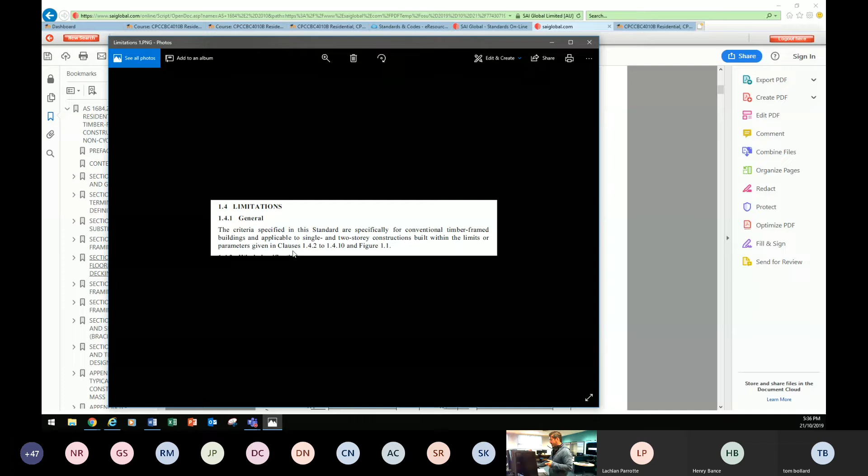This is for AS1684, I think it's .2. The criteria specified in this standard are specifically for conventional timber frame buildings, applicable to single and two-story construction, built within the limits of those parameters - so that's those clauses within that standard.

And I'll just give you one instance. You can see for this one it shows the sizes of the building, the spans, the parameters. It'll give you, for example, the width - if it's a 17-meter width, that means you'll have to get that engineer design. You can't work it out yourself as per AS1684.

Does that make sense? We'll be doing that in more depth next week, but you just have to think about the building parameters for whatever document you research. You need to check any of those building parameters because you might be looking for something and the information is completely wrong because your parameters aren't right. I thought I'd throw that one in there.

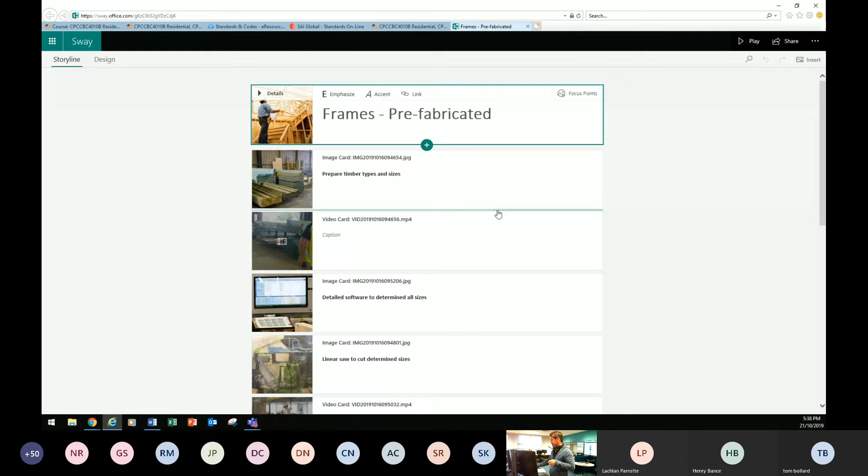We had the staff go and have a visit to Bunnings Frames and Trusses, and I want you to confirm if you can actually see the detail. It's just a little PowerPoint, but it's through Microsoft. Has anyone actually been to a Bunnings Frame and Truss place?

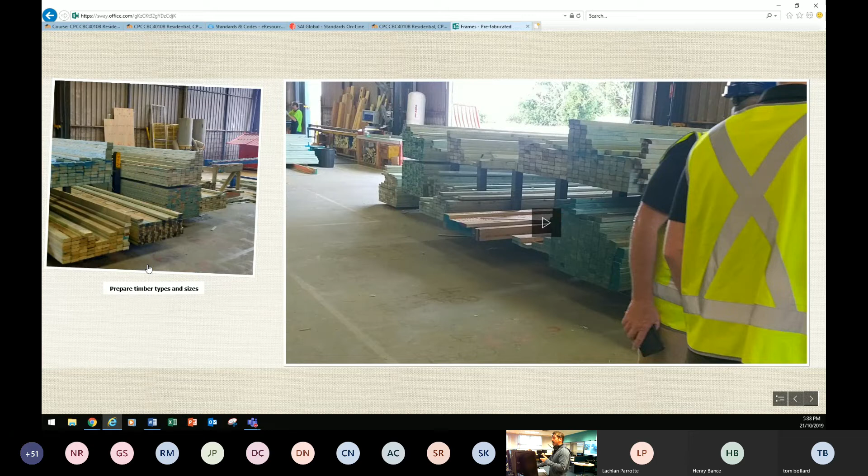Yeah, I just thought it might be interesting. This would probably be not even 10 minutes, but we wandered around. This is for the frames that were being built, and for those online, I don't think you can hear the audio. You can watch this on your own time, but it doesn't matter because it's just machinery going, so there's no need for audio - you can just watch the screen.

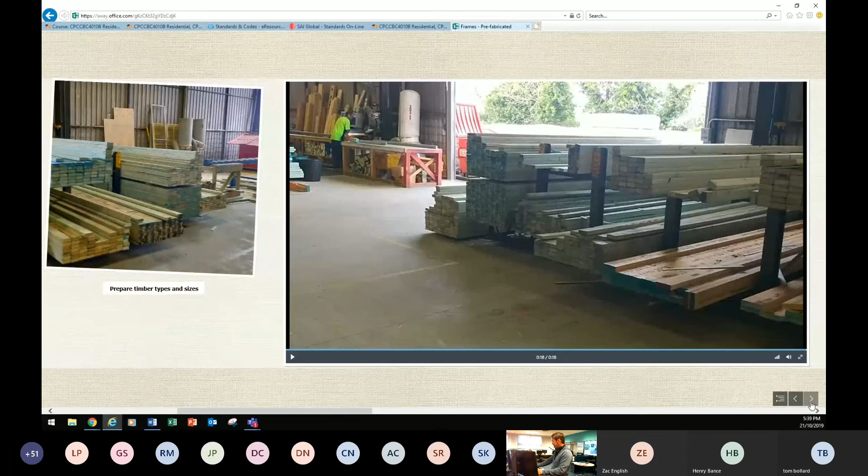Righto, so they're stacking their materials, getting all the right timbers correct. Then they have their detailed software to determine the sizes, and they use - apologies for that shot there - a linear saw to cut the sizes accordingly from the computer program.

Then there's a guy who comes in and he actually starts nailing them together. And I've never seen how they nail them together - I've been in the trade for a long time, I've never actually seen this. I just thought it was interesting. So watch how they nail these together.

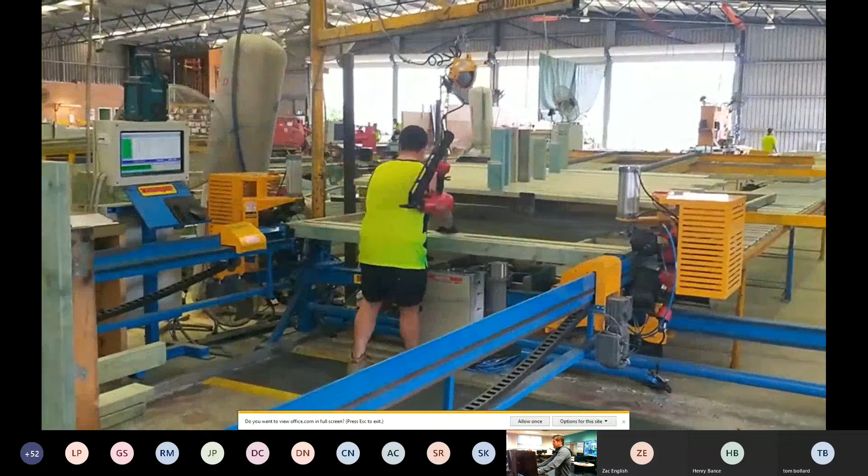They actually have the noggings cut at those specified sizes and just nail it together. It's amazing how accurate it is, and I haven't seen it done like that before. Then they get it on the table and move it around to finish off with some more detailed work, putting on their bracing components.

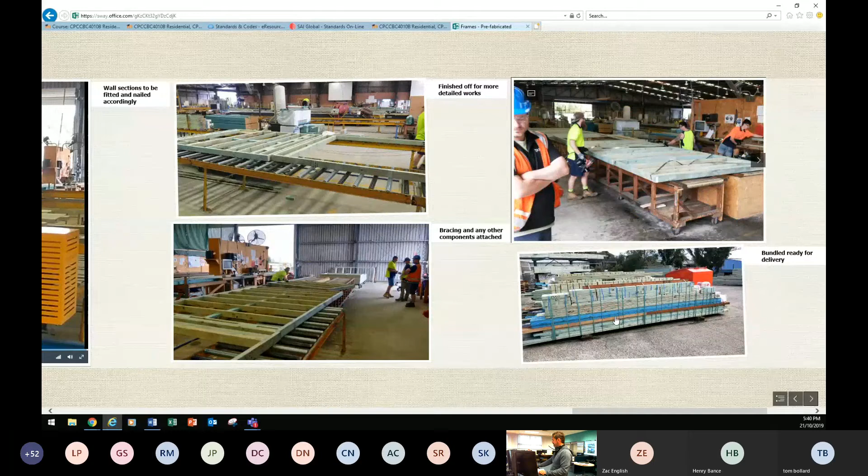All right, that's for the frames. And then I'll open up this one. This is only less than 5 minutes, boys and girls.

Same thing, very similar. We'll have the truss, you can see the truss. I'll let you look at this in your own time. I'll just put a couple of quick videos up so you can see the truss components. They all get cut to the designated sizes.

Here's just a video showing where the machinery is. You can see it's on the right hand side. It was getting serviced at that time, so there was nothing getting cut up.

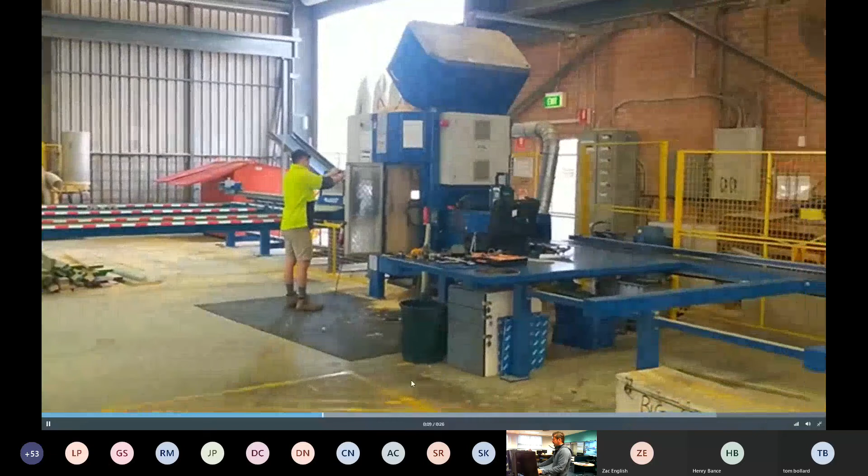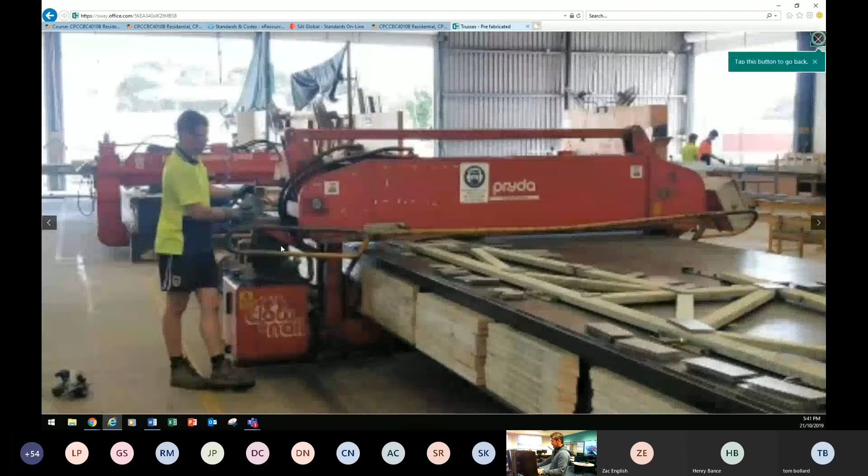And then you can see the ancillary items are stored, and you can see the assembly where they start putting it together. I'll just show you when they start joining it up, and then they press. Sorry, I'll go back.

When they start nailing off the gang nail plates, you can see the hydraulics where it comes in and just presses it down.

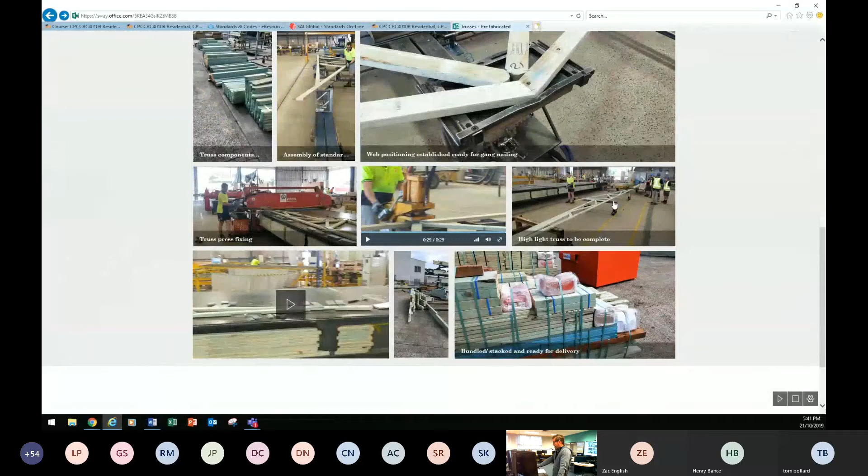They've got the big table there for bigger frames, or sorry, bigger trusses. And I'll just finish off with this one.

No, it's not going to work. Anyway, it's the same, you can see it's that picture there where they - oh, no, it's working. Yeah, sorry.

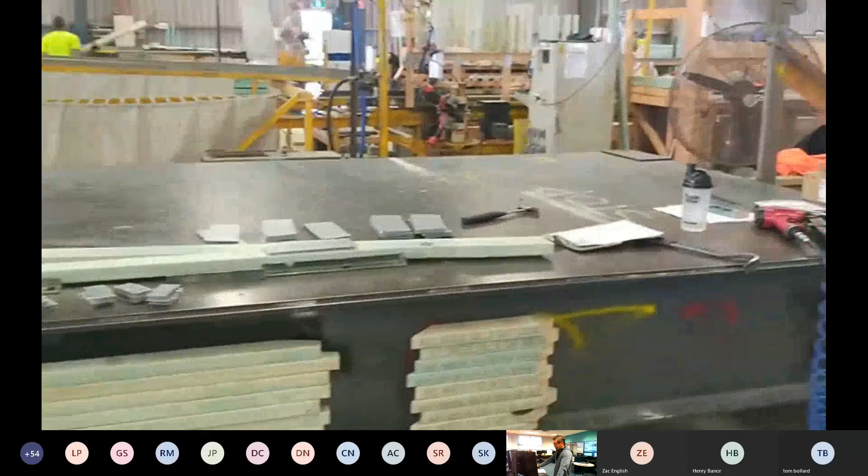So anyway, I thought I'd just put that up there for you. I found that interesting because I've never really been to a frame and truss place, and it puts it in perspective. The thing I found interesting was that they were there for an hour and they didn't stop working, those guys. Everyone was just cracking into it, no mucking around. They all wore their goggles.

All right, I'm nearly finished. I've already spoken about the building parameters. Tonight Adrian's going to get stuck into load paths and primary loads and so forth. The one thing I want to show you, to make you think about why we're teaching this, is to understand the requirements for engineers' design and for you as a builder, to make sure every item gets placed.

Do you remember the National Parks and Wildlife job that I put up for the commercial one? I've taken a snapshot of some design loads. Now this is in the specification, right, and this is where Adrian's going to be talking tonight. You can see it goes into the design.

It talks about the live loads - in general, for all levels, it's 3 kilopascals. It goes into the wind loads, and you can see there's a reference to AS 1170. Then it goes into even more depth with any earthquake loads and so forth.

But I put that snapshot up so you can understand why we have to talk about it, and why certain bracing requirements go in, or why certain depths for a footing or certain sizes of steel go in. If you actually don't do it, that's where you get yourself caught and in trouble, because once it's done, as a builder, any rectification work or rework - which is a bit of a dirty word - is not good.

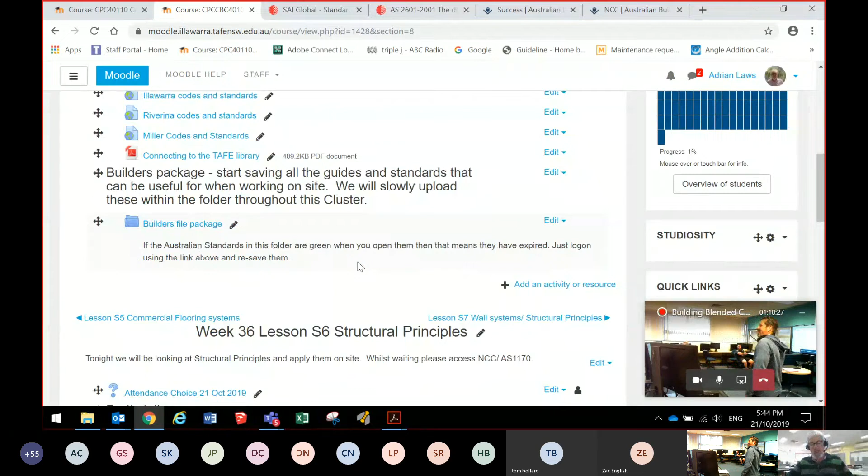Okay, thanks a lot for that, Brett. That's very interesting, some of the things you went through there. Some of you guys will have had an opportunity to see how truss and frame manufacturing places work over the years. That's real good to understand, because they're the ones who often build things for you. I actually worked in a truss and frame manufacturing plant as a supervisor, marking out frames as part of my apprenticeship for a little while.

We ran out of work on the Central Coast where I was working, so I went and got a job there, and it was a real good period of time. We used to try and plan the wall frames and everything, picture where they were going to go, so everything fitted together like a Meccano set when we put it out on site. It was real good. I hit something with my bumper bar one day, and those big 20-ton jacks were real good for straightening and bending pipe. So it was good.

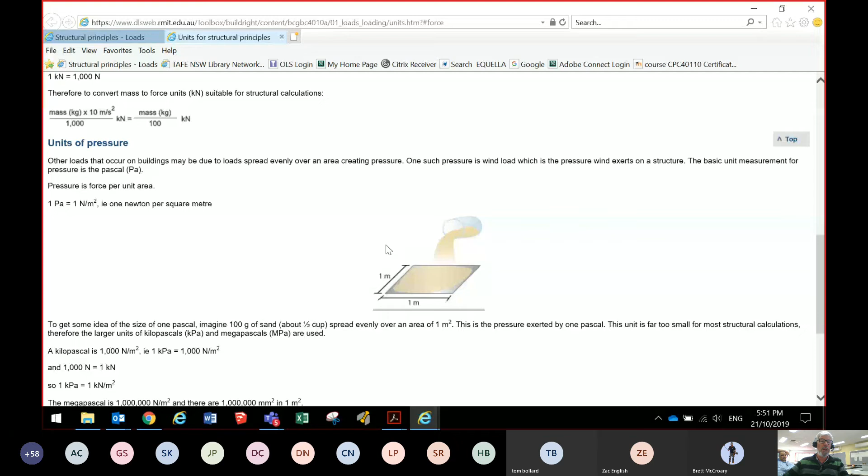You can actually see how kilopascals works and see how those different things work, and that's just a bit of extra information there for you.

So I'm going to focus now for a moment on primary loads, and we've talked about these a little bit already. We've talked about a dead load - so the dead load is, for example, a beam and a couple of columns, and that load exerting down onto things. Basically a dead load equals the volume of a member times the unit weight of the materials.

Lots of products, in fact most products, have already been weighed. You can find out most of the properties of products on the safety data sheets or material safety data sheets. But in the standards, especially the Australian standards for lots of different products, we have this information that's been published for us.

So reinforced concrete is generally accepted as approximately 24 kilonewtons per cubic metre. Hardwood is often accepted as, for example, 11 kilonewtons per cubic metre. Mild steel, 77 per cubic metre.

So if we know that information, we're able to look at a beam like that with measurements on it, and we're able to do this little calculation.

So we find out the volume - length times depth times width - equals 1.8 cubic metres, and if the kilonewton per cubic metre weight of reinforced concrete is 24, as per our example, then we're able to work out what the total weight, or total kilonewtons, of a dead load of that particular beam would be.

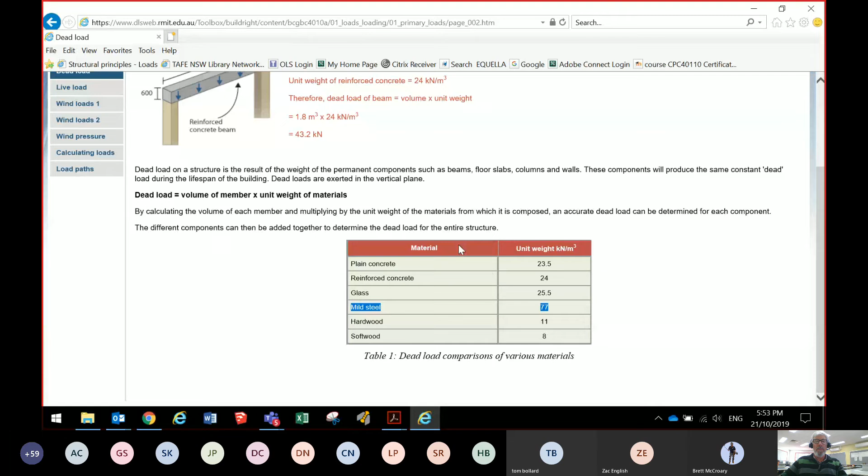Now this chart is just an example that's been put on here. The Australian standards actually has all the different materials on them, so we can see the latest information there. So I think we're pretty good with that - Brett's put a little post up on here.

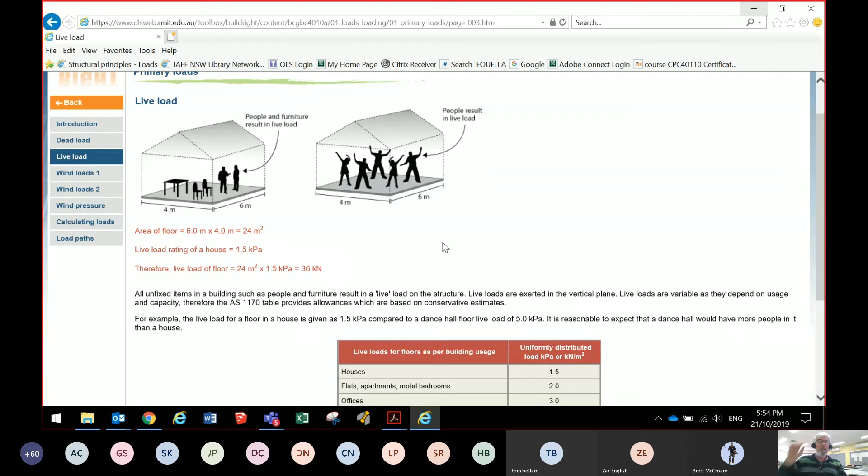Now the next thing we have is live loads, a different thing again. You can see there's a bunch of different loads listed here. Live loads is something we have to be aware of because it depends on what's likely to occur within the building. It's generally accepted that for houses, the live load rating is 1.5 kilopascals, which means 1.5 kilonewtons per square metre.

So if we know how big the floor is, we know how big the four posts on each corner of that building might need to be. We're able to work all that out. In this case, the area of the floor is 24 square metres, the live load is 1.5. Multiply that out, we come up with 36, so that's 36 kilonewtons right across that whole area that could be the live load.

On top of that we've got a dead load as well, which we've got to allow for. And then there'll be other loads too - wind loads, there could be snow loads, there could be all sorts of different loads depending on the building, earthquake loads, those sorts of things. So this gives you an example of how live loads are worked out.

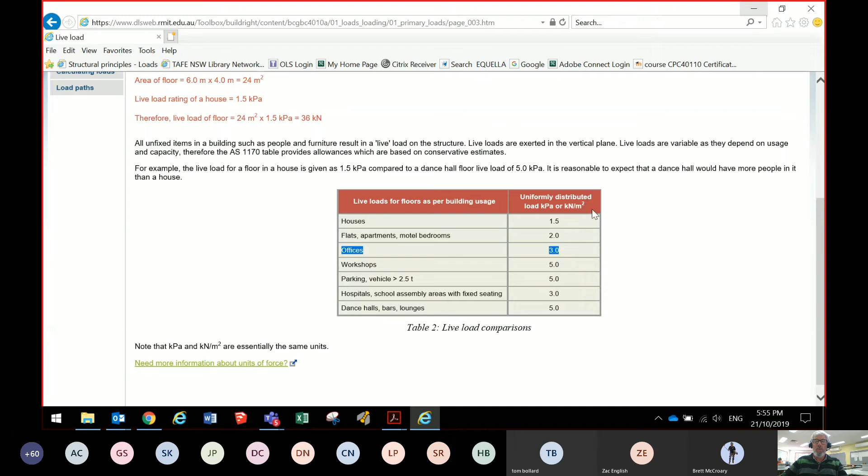Look at the different live loads here. For an office it's often accepted that we're dealing with 3 kilonewtons per square metre. For workshops, and for parking vehicles, 5 kilonewtons per square metre - this is greater than a 2.5 tonne vehicle. So this is allowing for per square metre, which can be related back to kilograms approximately.

Remember that we work on approximately 10 as the factor for kilograms to kilopascals and kilonewtons and things. But that comes back in when you look at the definitions page that I showed you. So I've spent a little bit of time on dead load, a little bit of time on live load. We definitely have those two things occur on all buildings.

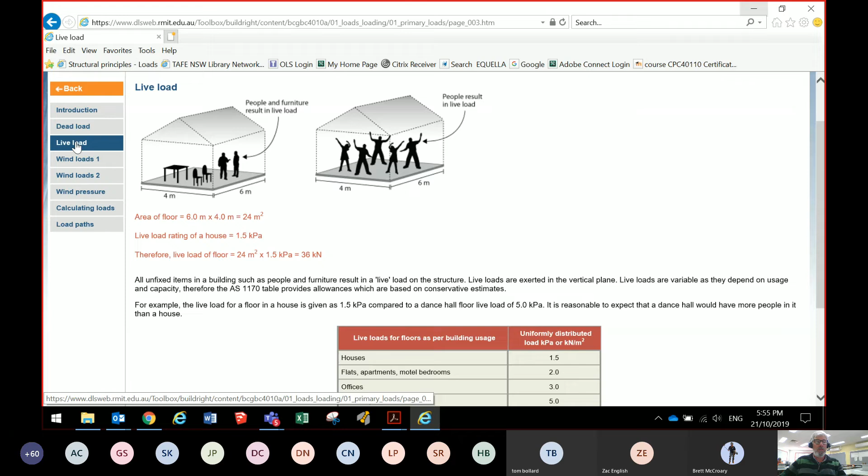A third thing we have to allow for is wind loads. No building is immune from wind, but some buildings have less wind than others. An example is I went out to the community garden where I used to live before we shifted into town recently, and we were talking to them, and somebody was saying, boy, it was windy the other day. On Saturday we had a lot of wind in Wagga.

Someone else went out to the cancer thing where you walk around all day and all night. They went there and it was out in a paddock just out of town. They said that was really windy. And I was thinking about in town, it was hardly windy at all.

So depending on where the house is will determine how much wind load is going to be on the building. All these sorts of things come into it, so we have to do a calculation for every single house, which we will do as we go through these units. Wind loads have become very important in recent years due to the extensive use of lighter materials, and obviously the lighter and more efficient we can build them, then we don't really need to plan for a big strong wind when it's never going to be subjected to one.

Then we have a thing like a vortex, which is a whirling movement of air that can occur and give us negative pressure on one side of a building. Wind acts on the structure, and we basically work on the fact that the wind is going to act from the left-hand side of the structure in this case, and the right-hand side potentially the same. If we work on the worst case, that's how we build the building. But the wind is also going to act on this end and the other end of the building, and we work on the worst case scenario for the building.

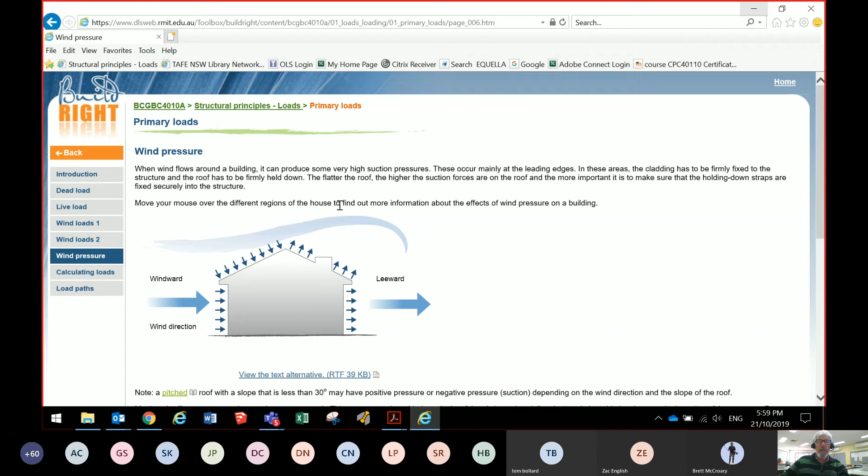Move your mouse over the house in the different regions so you can have a look at this. I think this is set up so that when you move your mouse over the different regions of the house, you find out more information about the effects - there's a little interactive thing there. Not quite sure if that's working at the moment, but you can have a go at that to find out about the different effects of the pressures on the building. That's not actually working, but anyway, that's all good.

So here's some of the factors affecting wind loads. Now I want you all to have a look at the screen for a second, no matter what you're doing. I want to point out to you the things that go into the production of a letter and a number that enables us to do all of the rest of our structural calculations for the building. So we're after a number.

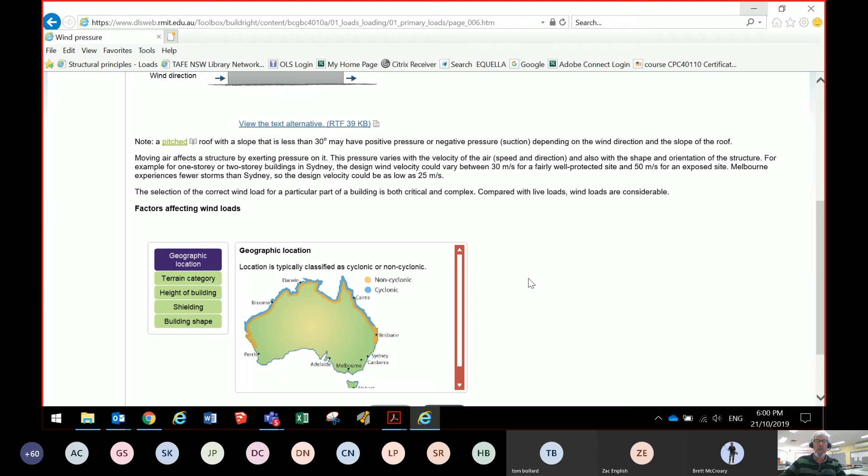We're after an N1, N2, N3 or N4, or we're after a C1 or 2 predominantly in Australia. And to do that, we need to be able to do some calculations. This is just an example, and then I'll show you the Australian standard so that you can easily do these calculations and work this out.

If you look at the first thing we have to be able to do, it's find the geographic location in Australia. Now for all of us here watching this tonight, we're all pretty much in the green area. Some are down here, some are down here, some might be there. If you're anywhere within, say, 100 kilometres of the coast, anywhere from probably Coffs Harbour north, all the way around through to Geraldton, around the coast but not right on the coast - when you get up around this area, you'd still be non-cyclonic.

Once you get up around this area, you go into cyclonic, and obviously the wind gets stronger. So you think to yourself, I thought it got real windy down in Hobart, and you've had a cyclone go through Bega or Illawarra or somewhere not that many years ago, wiped out a few houses. Well, you can get freak cyclones and freak winds that come through.

Predominantly, this rating is going to be designed for what they call the 1 in 100 wind rating, and that's what the engineers work on. You can have the 101st year wind that comes through - that becomes an insurable event, obviously, and some things you can't necessarily always build for, but this is predominantly what would be used for most structures.

The first thing we have to find is a geographic location, and we've got to write down what type that is - that's type A, but we're going to find that in a second, where you see that written down. The next thing we have to do is record what type of terrain category - are we in an area where there's, in this example, greater than or equal to 10 houses per hectare or house-size obstructions, or are we in well-wooded country, or where are we?

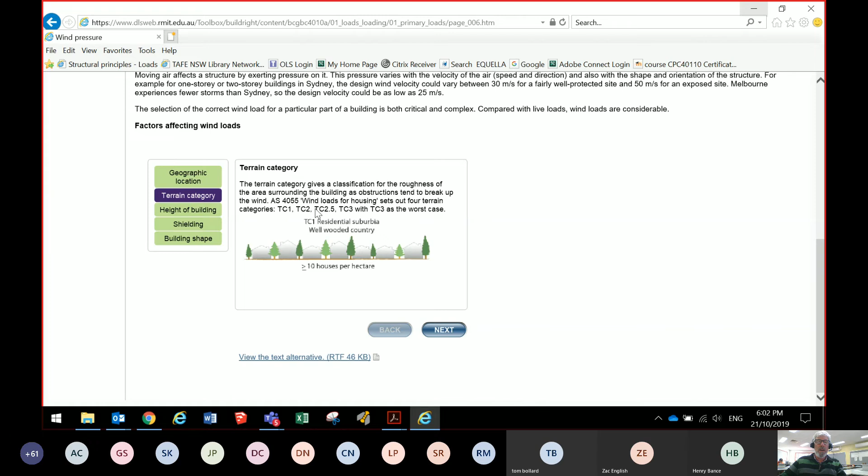When you look at the category, we have to choose a terrain category, and we write that down as well. So we write down the geographic location, the exact street address of where we are, and the terrain category of this exact street address we've chosen for our building.

We calculate the height of the building - in other words, we work out how big a building is going to be exposed to the wind. We also work out the shielding - is it right in amongst a whole bunch of other buildings, or right next to a big open paddock? And we look at the building shape. All of this brings us to being able to calculate the wind loads that are going to occur.

If you look at this next interactivity, you can see, for example, in this question it asks what is the wind load rate on the windward side. Let's make this play again - not sure if that's actually working all that good. Here's an example of the wind blowing over there, and here's the wind load rates.

So if we've got a wind of 1.5 kilonewtons per square metre blowing against that, and on the roof it's a positive 0.8 kilonewtons per square metre, we've got a negative here and a negative there. We're able to do the calculations and work out what the loading is going to be.

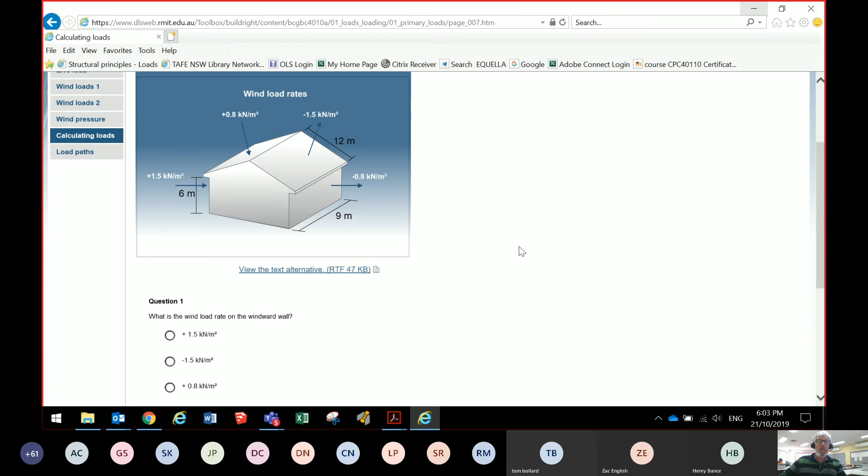I think it gives us the answers there. So you can see this is a little interactive thing that lets us actually work out what the loading is going to be and what the pressure is going to be, and we'll come up with an answer.

So what is the wind load on the windward wall? This seems to be operating real slow here. Pretty much if you go 1.5 plus 0.8 minus 1.5 minus 0.8, you end up with a naught there - actually, no, you won't.

Because this 1.5 is coming off at a bit of an angle, we look at that and work our way through to do the calculations on those ones. This is working real slow here at the moment - we'll try that one. And here's another one here.

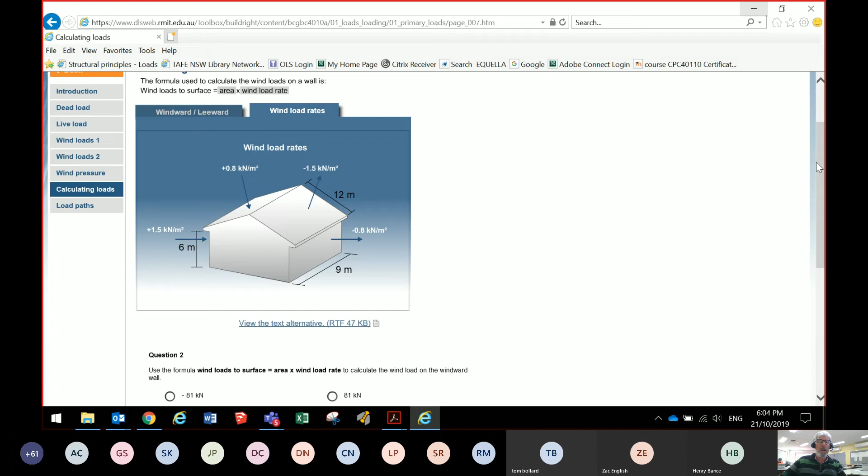I'm not actually doing these activities here at the moment, but I'm going to show you on the code. I think some of these activities are quite good to give you an overview, but the code is actually very self-explanatory, so I want to focus on showing you how that works.

I'm just going to go through to load paths as the last thing we talk about. Actually, let's stick to that - I'll go back to the code.

Right up the top of your work, remember you've got all your codes, and you can access them quite easily. I've actually got it open - I think it's probably still open here. So I'm going to search for it - it's not still open, so I'll shut that down and get it started again.

Here's my codes. Remember, you can access your codes just using your TAFE username and password. If you've forgotten that because you've got it remembered for accessing the Moodle site, you might just need to reactivate that again to get your code. If everybody tries to jump on it at once, that might slow it down a little bit. But I'm just going to show you...

4055, because 4055 is the code - the Australian standard for wind loads on houses and buildings like that. And here it is, you can see it's there. We don't want amendments, we don't want the superseded one, we want the main one. So we'll just view the document. It seems like nothing's happened, remember, but it eventually will happen in most cases.

This code is much the same as all the codes we're going to be dealing with this unit, in that I'm just going to download it and put it with my codes. I probably already had it there, but I'll save it again so I've got a bit more interactivity with it. You can see I've got bookmarks on the side, which makes it easier to find my way around. I'll turn some of those off so we can get the overall view.

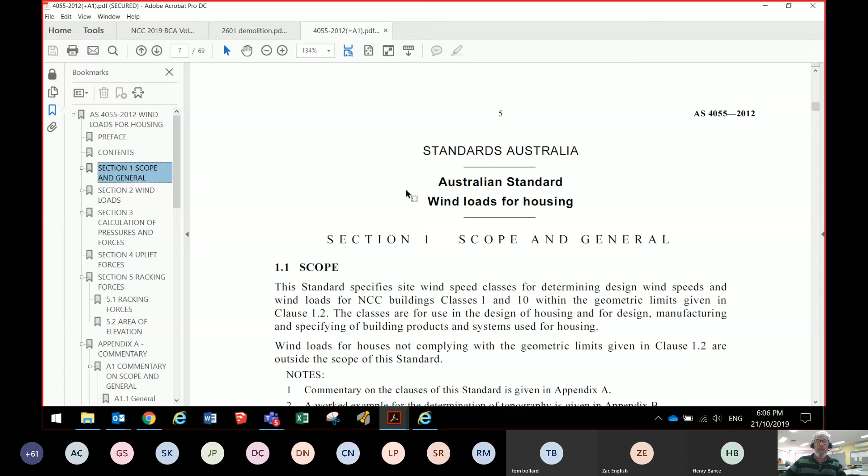When we look at Australian Standard 4055, it's like most Australian standards - anytime we have to do anything, we just work our way slowly down through the standard. Pretty much all of them have this type of information. There's an introduction at the beginning that tells you a bit about what it's for, and you can see this is for housing. It's got the word housing up the top there, and you all know now that the National Construction Code has housing as classes 1 and 10, and that's the one set here.

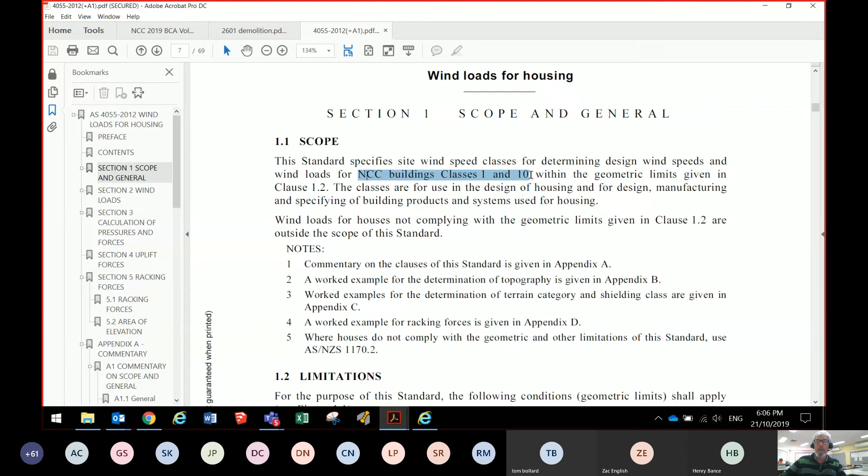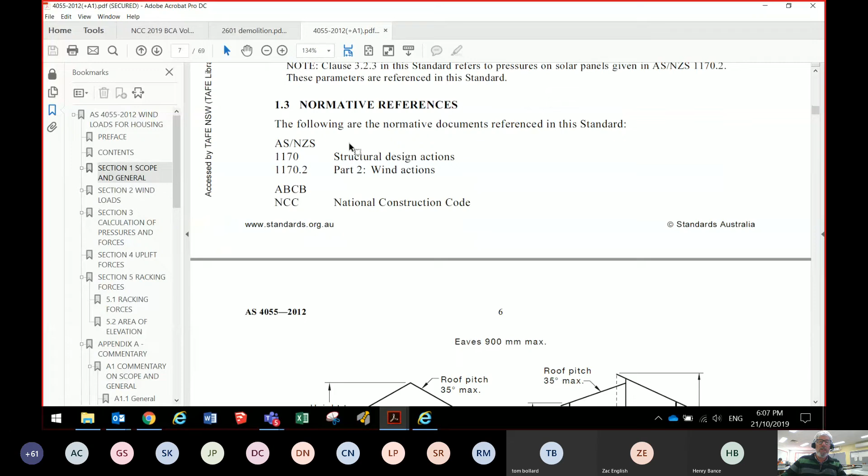There are some limitations which are shown here. It's not going to be above a certain height, or above a certain width, or more than a certain steepness of roof and things like that, so you just need to remember that type of thing. Then as we work down, it gives us lots of other standards and things that are referred to.

It actually gives us some drawings here showing the geometry of the buildings that it relates to - maximum of 16 metres in this direction, maximum of a certain slope.

Then always at the beginning of these standards there are definitions, because the wording is specifically written so that we can't get confused with what a word means. For example, racking forces - we can see what those things mean.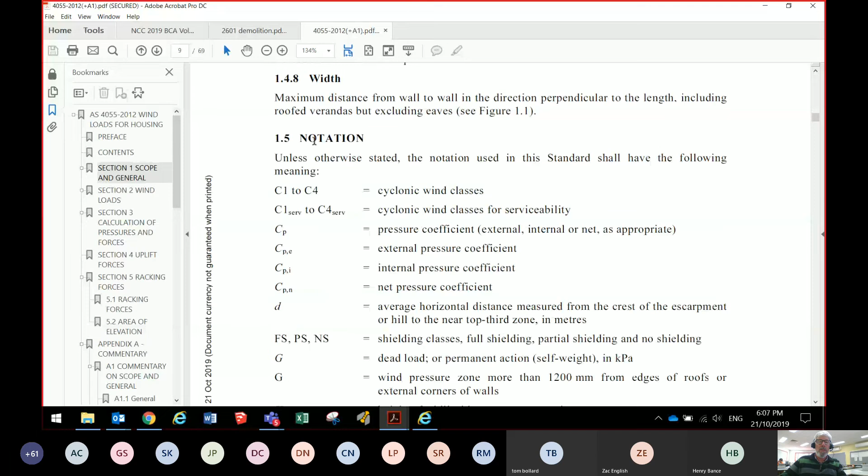There's a bit of notation which is more for the engineers - that's basically how they work their formulas and things. That normally goes straight over most of our heads.

Then when you come down here for section 2, we've got wind loads, and here are the main ones for non-cyclonic areas, 1, 2, 3, 4, 5, going up to 6. This gives us our serviceability limit state in velocity per second - meters per second - and this is ultimate limit state. That information is going to be more for the engineers.

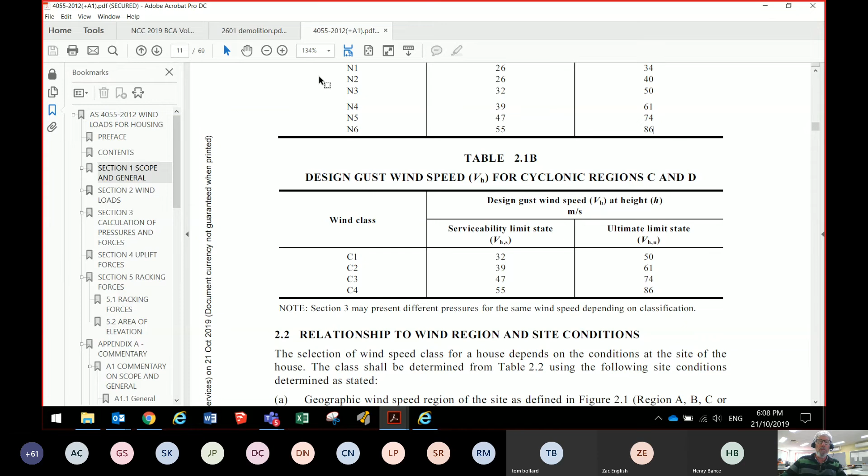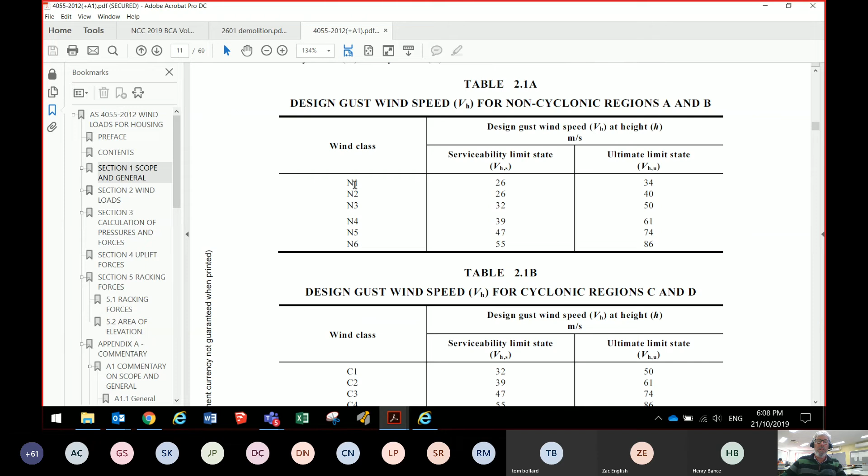Right here is the most important information, probably, in the whole book, because these four parts are exactly how you fall back into one of these classifications. As soon as you go to design a beam, a tie down, a bolt, or a piece of wall framing, it's going to ask you for one of these numbers - N1 to 6 or C1 to 4. That's the whole purpose of this book.

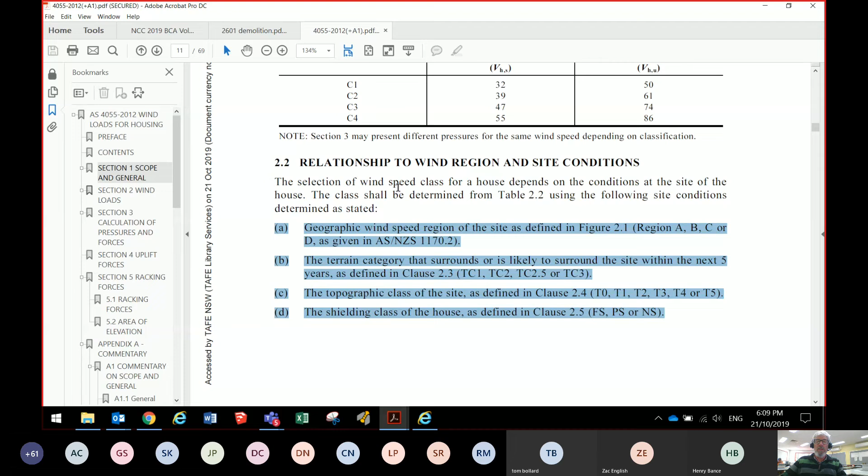So this is 69 pages here, and if you could bypass those 69 pages - which you actually can, I'll show you that a bit later - and just get straight to N1 to 6 or C1 to 4, that's all you want. But for the purposes of learning, so you can become a bit more educated, you need to follow these 4 steps.

The first step is to determine the geographic wind speed region as defined in figure 2.1. You get a pad of paper, your house plan and your address, and you look in figure 2.1 - we're looking for a figure, remember, not a table. We come down to figure 2.1, and there it is. I'll shrink that down a bit so you can see - that's the one I showed you earlier.

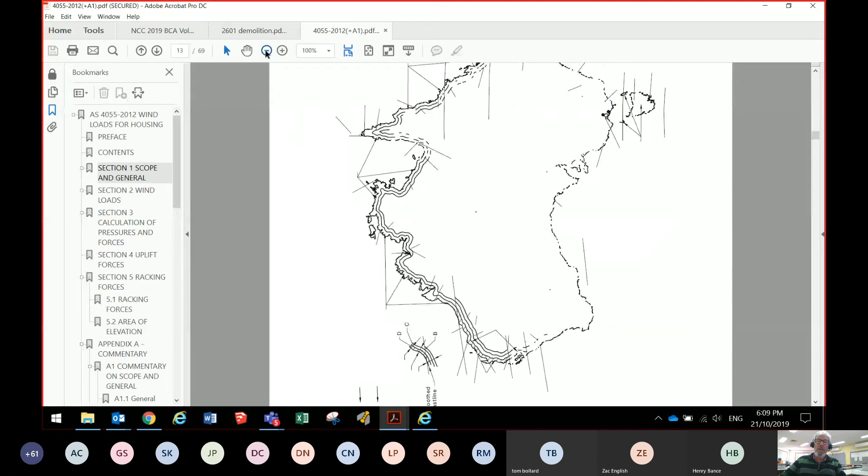That gives you above 30 degrees. You can basically see where we all are there, and anywhere in our area is called region A. So we follow that part of the chart, and once we have that, we write it down.

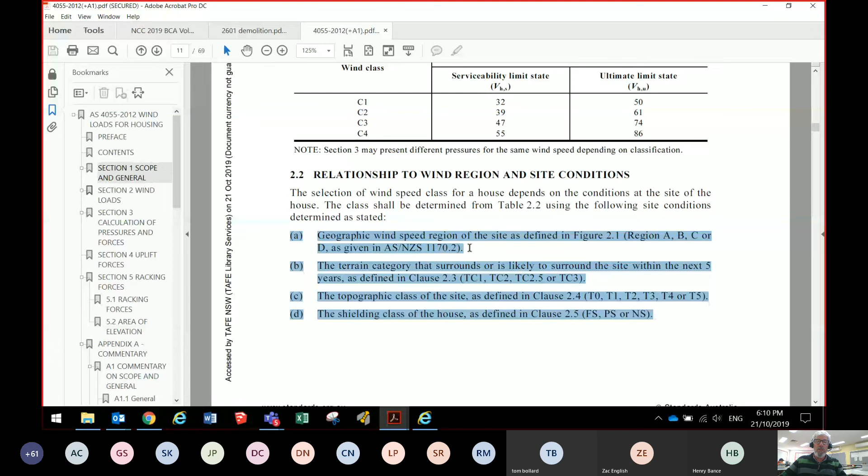You're going to need to do an assignment later on, and here's what I recommend. Grab this piece and put it onto a Word document. Write down the address of the house you're going to develop the wind rating for, then go to your region and write that down—region A—then go to your terrain category.

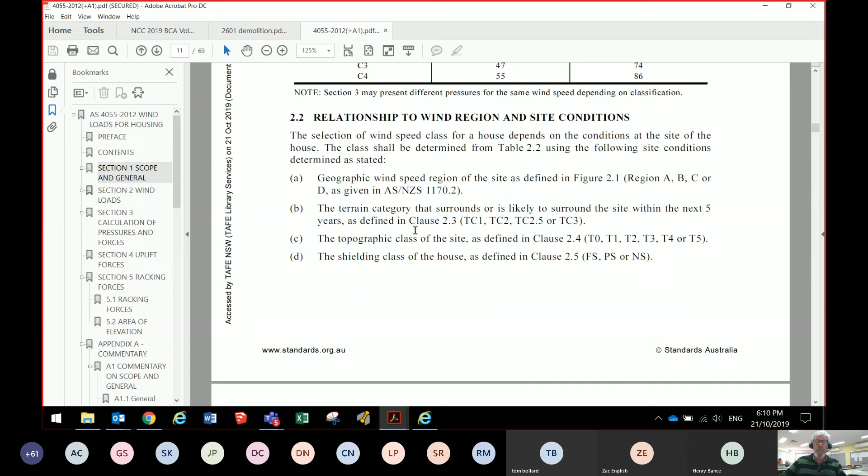For terrain category, you have to go to clause 2.3. Remember, terrain category is what's likely to happen in the next 5 years. We'll work through some of these specifically, but when you go to that clause, you just follow what it says to do for 2.3, and you'll come up with a reading from there.

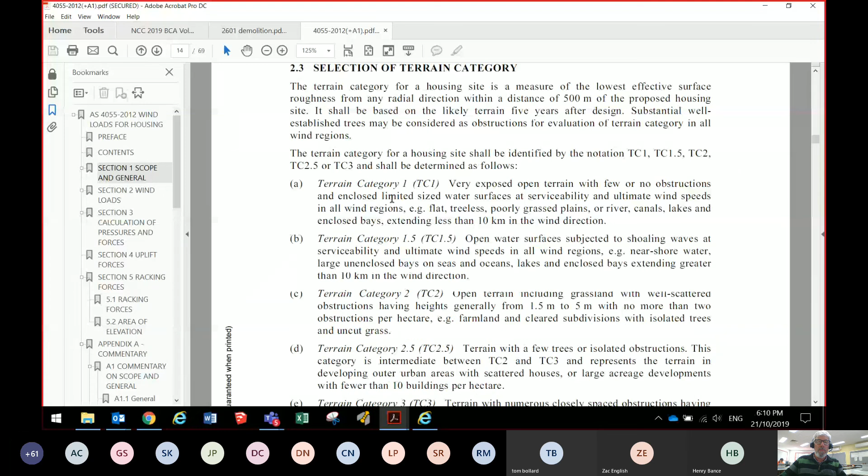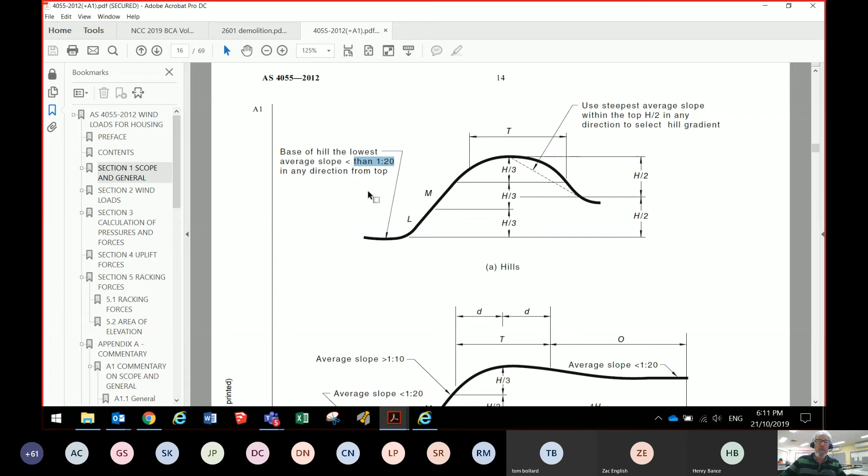The next one says go to clause 2.4, which is topographic class, and you work your way through there. You've got to take into account the slope of the ground—hills and things like that. Are you at the top of the hill, halfway up, or down the bottom? The first question is, what is a hill? Is a little bump in the road a hill, or is it something like the escarpment at Wollongong? A hill becomes anything with a slope greater than 1 in 20. So you need a topographic map to do that, and you know all about that now since you've done builder setting out.

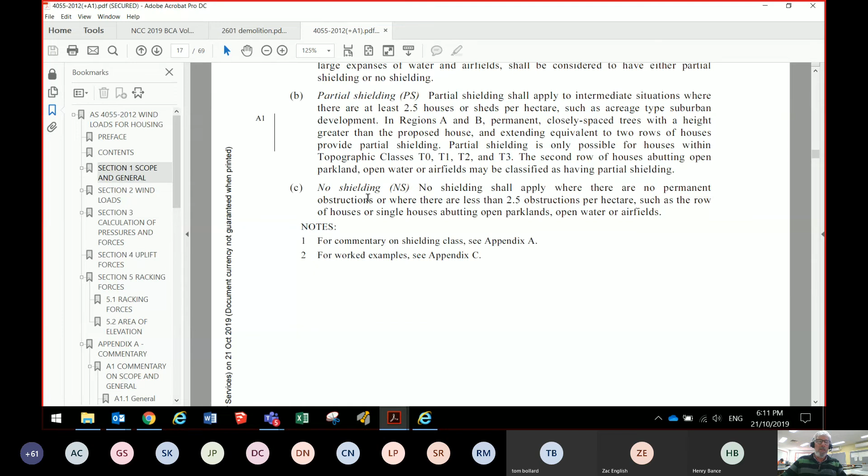Then you look at the shielding class and classification—shielding ranges from full shielding all the way down to no shielding, like a building right next to the ocean at Thirroul, right on the water there. That's an example of how Australian Standard 4055 works to help us determine our loadings.

I'm just going to jump back to this, which I already had open. So that's an example of how our wind loading works, and we'll eventually come up with one of those ratings, from N1 to 6, all the way through to C1 to 4.

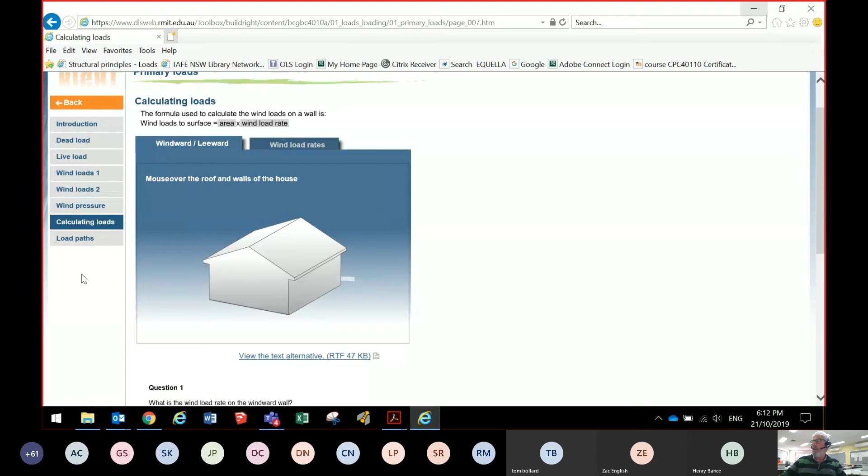You don't have to have a full understanding of all this at the moment—we're going to work through it. But I've shown you the standard and pretty much how we can take an address and find the terrain from it. We can do a desktop audit and produce a desktop wind rating for a house, and then when we look for the tie-down bolts or bracing, we can take all that into account. Any questions about that so far?

I'm pretty sure you've got heaps of questions, especially once you get the assignment. So think about it this way—we've got Mr. and Mrs. Smith's house plan. You know the length of the building, the slope of the roof, the size of everything, and you've got a site plan there.

If you picked yourself a site somewhere and went to Google Maps, turned on the terrain view, you've got the slope. So you're able to do a desktop assessment and come up with the wind rating. Then when we look at the bracing and tie-downs, you're able to come up with all of that and produce parts of the engineering details for the building—that's essentially what your engineer does.

Now, I did say there's a quick way to get that. The Australian Window Manufacturers Association produced a little slide rule where you put all that information in and it comes up with the wind rating. There are also calculators and things you can get where you just answer questions and it comes up with all the answers.

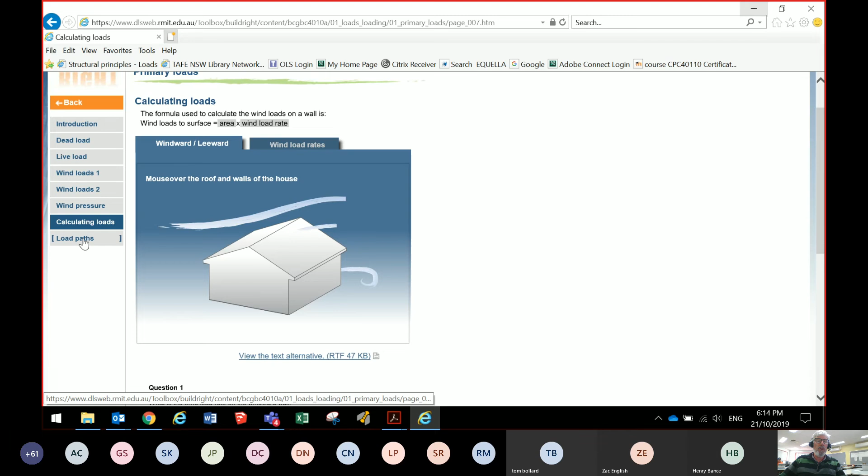The last thing I want to focus on here with loads is load paths. I want to show you how load paths work—basically, we have to be careful that we take them into account when we build a structure.

I'll give you an example of how that works. The load path is the path that the highest load on the building is going to take to get all the way down to the dirt and to the ground. You all have some construction knowledge now, so you should be able to work that all out.

If I click on this one here, I'm able to demonstrate what the load path could be. In this particular case, I'll identify a couple of structural members: we've got a main beam, a column, a floor slab, and secondary beams. Here's an example of the load path that could occur in a building.

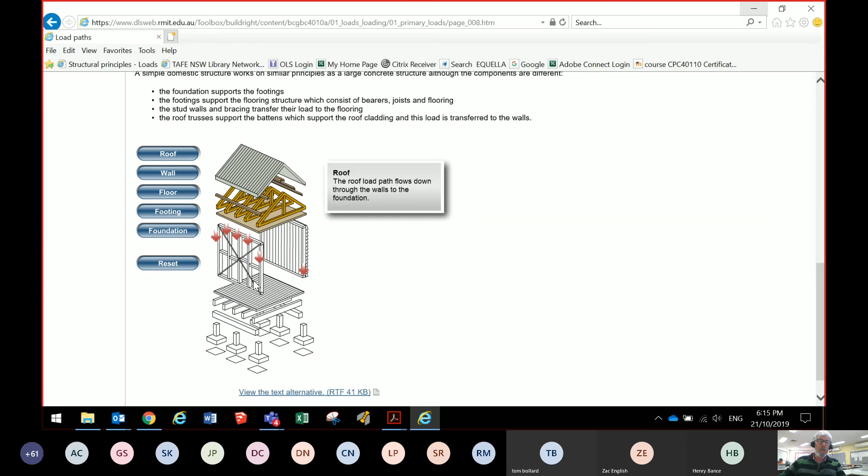The roof load path flows down through the walls to the foundation. Look how it's flowing down every single stud, every single truss, down through the members of the truss, down into the bearers and down into the footing. That's an example of how that works - there's your wall, your floor, and then through to your foundations.

You can see that everything has a load path. That's why the nogging is not a structural member, except that it just keeps the studs apart. Some parts of a building are structural and some parts aren't structural, but it all has a path.

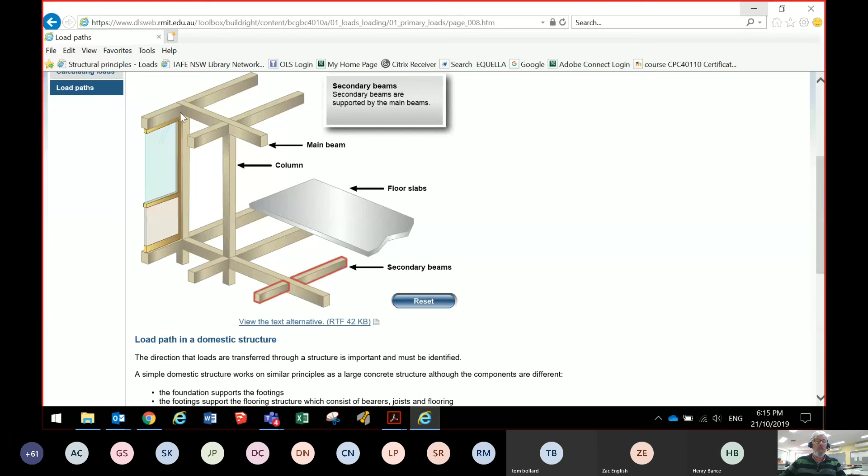If we have a window, for example, any loads that occur above the window will have to be transferred to the sides of the window, the left and the right, and we'll have to have a proper Australian standard approved method of joining everything so that the load path can continue uninterrupted down to the ground.

The second house I bought in Wagga years ago, I couldn't open the sliding aluminium windows. Has anybody ever had that problem before? When I eventually pulled some of the architraves off and had a look, I found that the builder had incorrectly attached the lintel into the wall stud with about a 10mm checkout, and over time that had moved.

The lintel was pushing down on the top of the window. It had squashed the window a bit, which meant the window mullions were essentially load bearing. What should have been done is it should have followed Australian standards and had the correct loadings run down through there so that it can transfer to the side studs, instead of having the weight go down onto the window itself.

It's real important that we get that right. Otherwise, we're going to get callbacks, we're going to get problems with things. We just want the forces and things to work correctly.

So I've covered loads pretty good. I'm just going to copy this link here and pop that back into the address so that I can cover forces, and I've actually got it in here now. I'm just going to jump over to the forces - I did spend a little bit of time on this the other day.

I'm not going to spend much time on that other than just quickly have a look. In fact, I'm not even going to go through that quiz with you because you're going to do that tonight. But if you looked at forces and things, we have to be aware of forces - we talked about that the other night and how forces can occur.

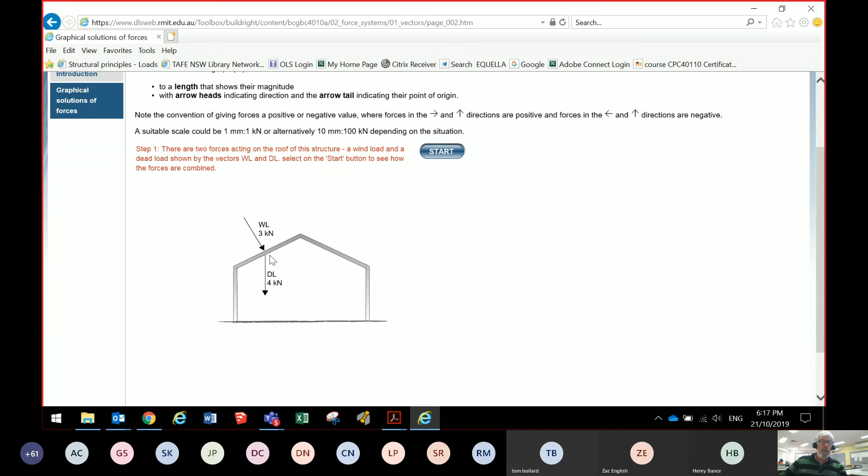Something I think we're going to focus on here is this: if we have forces that occur at different angles, then the resultant of those forces could be graphically represented by what you can see here with the little activity. Okay, so basically, this is what an engineer does.

If we want to know how we're going to resist a particular force, or what the resultant of a couple of different forces operating from different angles are, we can actually draw it to scale on a piece of graph paper like you can see there. In this case, we've got a 4 kilonewton force acting, where 1 square represents 1 kilonewton, so we keep it to scale - much the same as I showed you how you can draw your contours and put the site plan to scale.

So what we're showing you here is that if we have 4 kilonewtons represented by 4 squares, acting directly downwards, if we grab this 3 kilonewtons acting at an angle, running across at that exact length, so that distance there equals 3, whereas this distance down here represents 4. So it's kept to the same scale.

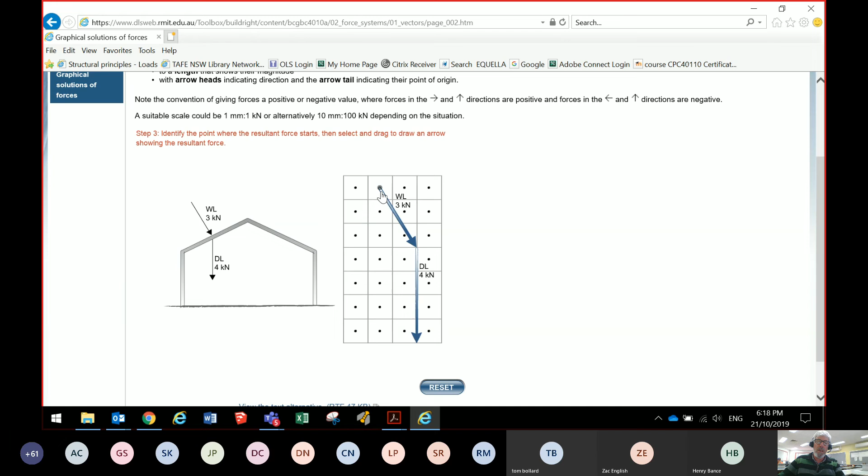And then the result is going to be that our resultant force, and I think I have to actually draw that in. So the resultant force is going to be a line drawn between where the force starts to where it finishes. And if we measure that line, that's 6.8.

Let's say, for example, this line down here is 10, or 1 millimeter. So that's 4 millimeters, that's 3 millimeters, this will be 6.8 millimeters. And if each millimeter equals a kilonewton, or 10 millimeters equals 100 kilonewtons, then we're able to actually measure that line and measure the angle of that, and we know that's where our bracing needs to be put.

So with the force coming against here and the force dropping down there, this being probably dead load, this one here being wind load, it doesn't really matter. We need to have enough bracing so that we've got 6.8 kilonewtons of bracing acting in that direction so that the building stays stationary.

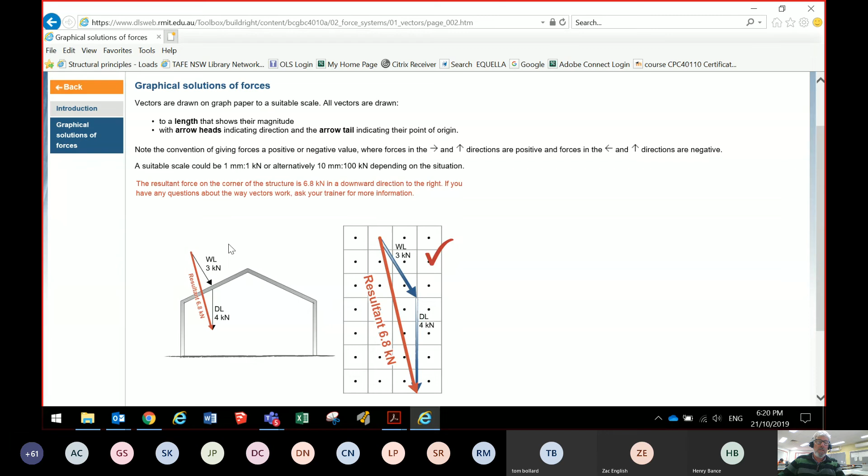Now this little activity can be multiplied and made harder just by drawing lines however you choose, but remember earlier I showed you a picture of a building with wind blowing this way, wind blowing this way, some sucking out that way, some sucking out that way. You can actually do this system on graph paper to calculate what the resultant force would be to keep this building nice and stationary and stable.

And this is what we do. So remember, this part over here is just drawing on graph paper to scale, keeping the angles and things accurately so that we're able to actually work out what the resultant force is of those two different direction forces and different size forces.

And this is a way that engineers actually work out, because you look at a house like Mr. and Mrs. Smith's house, and we've got to put some bracing through that house. It's already been done for you probably, but if you had to calculate the bracing for that house, you've got to work out, are we going to use sheet bracing, or metal angle bracing, or what sort of bracing are we going to use? And when we remember this type of thing, then we understand how forces work.

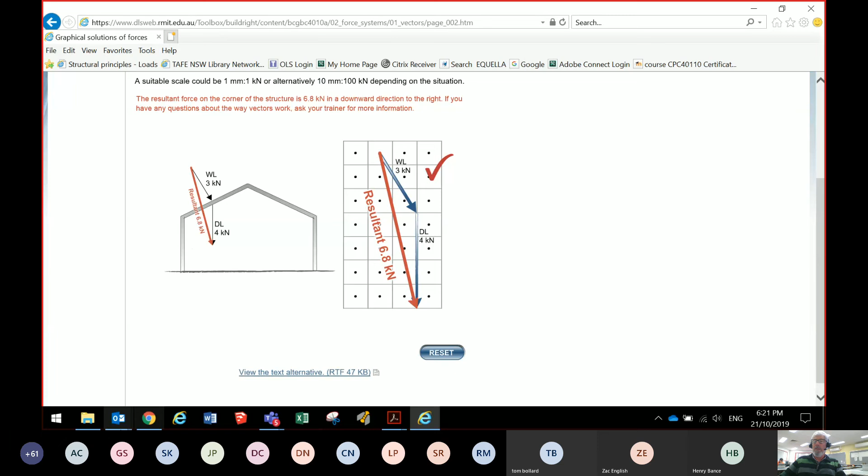So can everybody understand how that works? Johnny Bridges has got a YouTube video, I think he's just posted up there for it, a little bit about how that works. I seem to recall having a bit of a look at that one. So that's awesome. This is called graphical solution of forces.

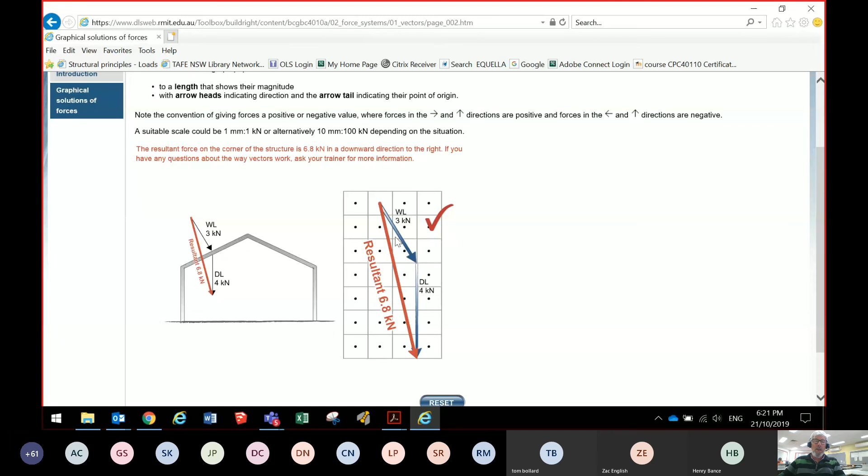Okay, and we have some things here called vectors. We have the size of the force, and remember, all we're doing here is drawing a scale drawing of those forces and giving a length of the line to represent the size of the force that's occurring, and then we're able to accurately work out what the resultant would be.

That's great, we went straight to that solution there. I do have to spend a moment here talking about, what's this one here? I think I need to spend a couple of moments talking about these things. So that's the statics, we'd had a look at that. Point load on a beam, not going to spend any more time on that.

Stress and strain, we just have to understand a little bit about what stress and strain and different types of stress are. There's a couple of things here we looked at, but I'm just going to spend a tiny bit more time because you've got an activity coming up tonight on that. So stress, like pressure, is a force per unit area. Stress is measured in pascals, or kilopascals if it's big, or megapascals if it's really big. You've heard that term before, haven't you? Megapascals for concrete strength, things like that. The most common unit used for structural materials is megapascals, typically 25 MPa for concrete and things like that.

So then there's another term here called strain, which relates to the deformation or change of shape of an object when a load is placed on it. Delicate measuring instruments can detect this, like scales or similar devices. The formula introduced here is strain equals change in length divided by the original length. If you take change in length divided by original length, the answer will be the strain.

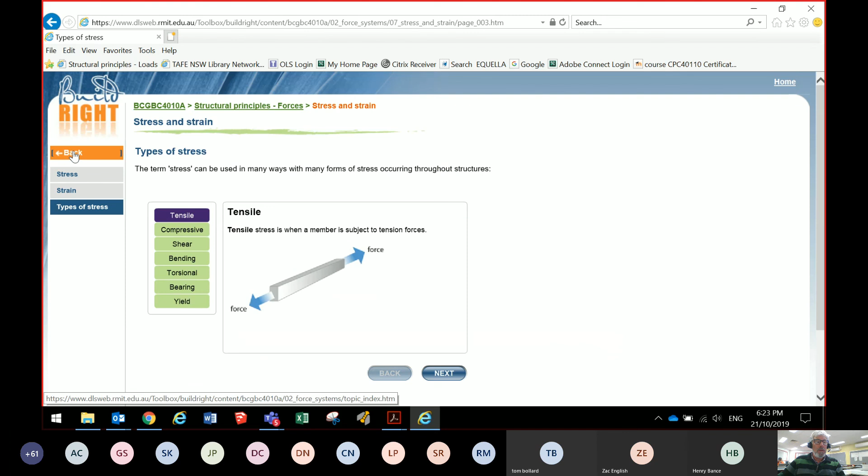And then for different types of stress, we've talked about this a little bit already, and how there are lots of different types of stress that can occur on buildings. I'm just going to skim back and see how we're going with the others there. I think we've covered most of those. Just going to copy this one and bring up the properties one.

And you can see properties comes up here on this activity once again. Now, properties deals with materials and what a material will do under different situations. So we have things like mechanical properties.

This is real interesting, because you'd recognize that some material is very brittle. That's the property that causes a material to break or snap off without any noticeable lengthening or changing, whereas other things are very hard but not so brittle. The term hardness is usually defined as a degree of resistance to indentation or abrasion.

If you've ever used an explosive power tool, one of the tests before using it is to take the fastener and scratch it on the material you're hoping to fire into. If that fastener blunts on the end and the material doesn't scratch, don't fire the fastener into it, because it's probably softer and will bounce back. But if the fastener scratches the material, you should be right to go, provided it meets the other criteria, obviously not being brittle and so on.

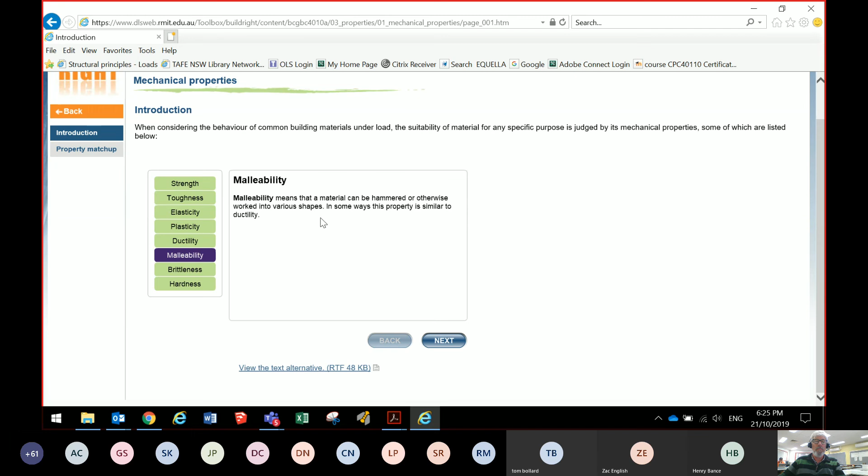Malleability is an interesting one, because it means a material can be hammered or otherwise worked into various shapes. Ductility is the property which enables a material to be drawn out like wire in the direction of its length. Plasticity is the reverse of elasticity.

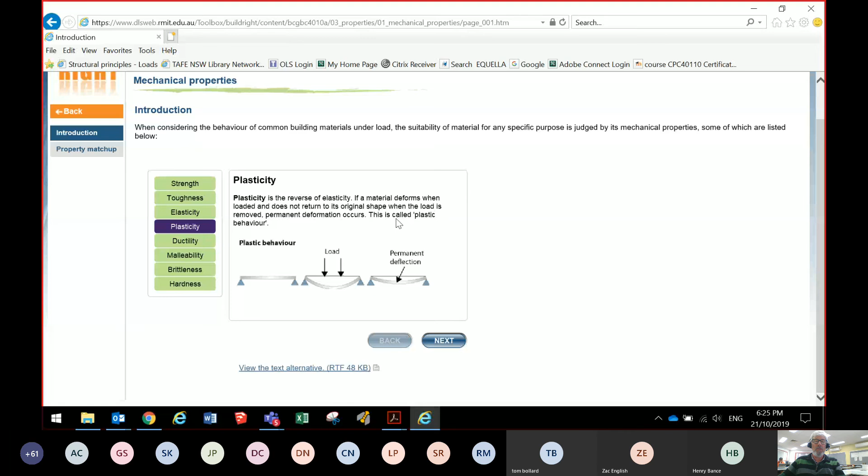If a material deforms when loaded and does not return to its original shape when the load is removed, permanent deformation occurs - this is called plastic behavior. Elasticity: almost all solid materials have some degree of elasticity. A material is said to behave elastically if it deforms while loading and then returns to its original shape when the load is removed.

You're thinking of mild steel, which is pretty good, but it gets to a point where it won't return. Think, for example, of high tensile fencing wire - you can deform that a fair bit and it'll bounce back again. But then you get low tensile wire, which you just bend a little bit and it'll stay bent.

And then we have things like toughness - the yield point is the point at which a material bends or breaks, look at that definition coming up there. Toughness can be defined as the resistance to fracture of a material by repeated bending or twisting.

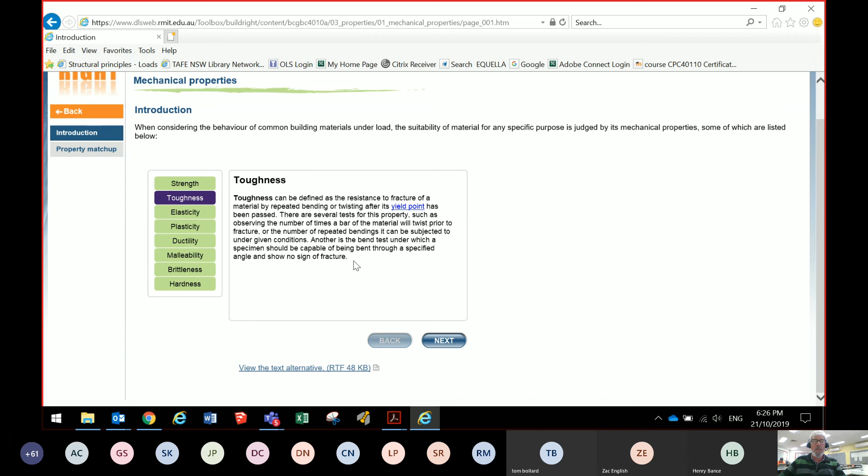So some material, like light gauge wire you might use to tie reinforcing off with, you can bend into a tight loop and bend it back and forwards five or six times and it'll snap. Whereas other material will take a long time before it breaks. And then the strength of a structural member is the resistance it's able to offer to the load that will just cause fracture - for example, the resistance that a millimetre squared of section can offer to the load that will just cause fracture. So we've got an example there of some terms related to mechanical properties.

Now, I'm just going to quickly look at property matchup here, and there's an activity where you can select and drag, and you're going to do that a little bit later in the activity tonight. So you've got one that deals with that.

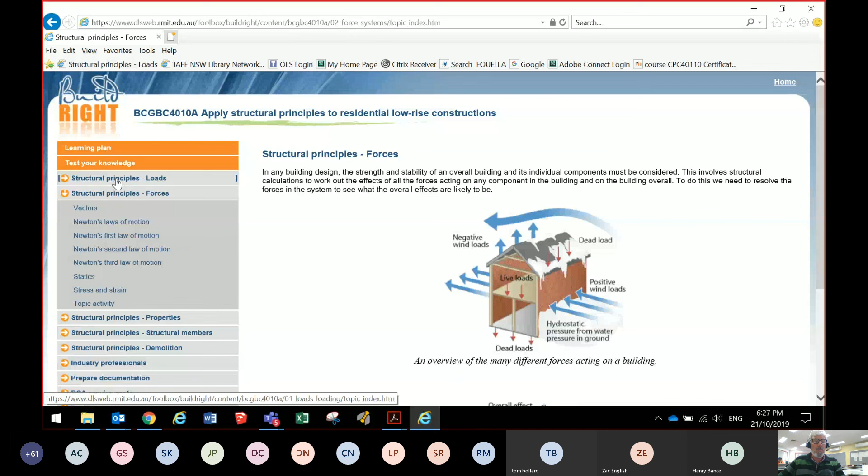The last one I'm going to talk about here is load paths, and we already talked about that actually. That's pretty much what we covered back with the structural forces, where we looked at load paths with wind pressure and that type of thing. So can you see there, we've got 4 things there for you.

Now, we've actually got some student notes here, which I'm going to open up to you, and it's a summary of those things. This is a Word document that you can save on your computer, and it's pretty much got a summary of all the different things we just spoke about.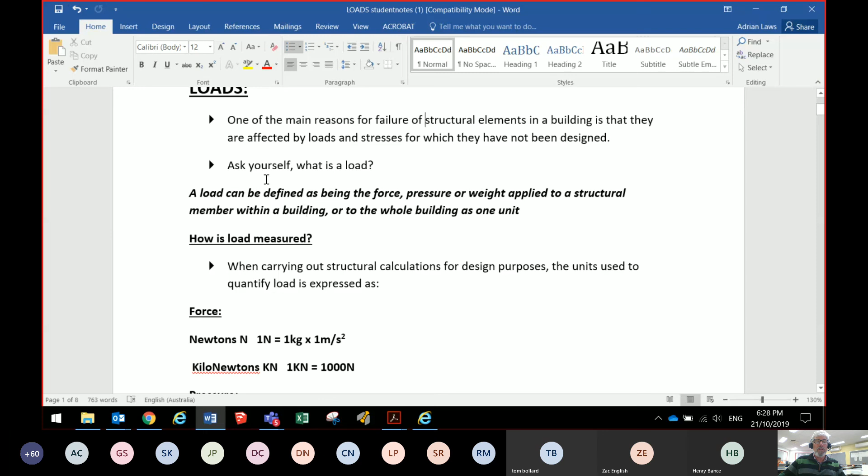So, for example, we go through here with loads. One of the main reasons for failure of structural elements in a building is that they are affected by loads and stresses for which they have not been designed. If a building has been designed for a force, then that's all good, it should stay okay, unless something else fails, gets eaten by termites or something like that. But if it's not designed for the force or load that's going to go on it, then that's not good - that means we've failed in our preparation and planning.

A load can be defined as being a force, pressure, or weight applied to a structural member. Load is measured in units, for example newtons of force, or kilonewtons if it's too large for newtons. Pressure is your pascals, your kilopascals, megapascals.

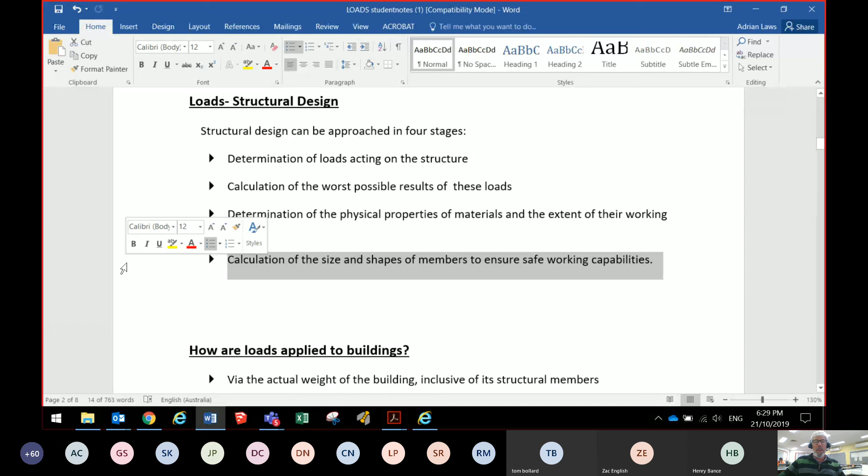Structural design can be approached in 4 stages: determine the loads acting on the structure, calculation of the worst possible results of the loads, determining the physical properties of materials, and calculation of the size and shapes of the materials to ensure safe working capabilities.

How are loads applied to a building? Via the actual weight of the building, the weight of the building's contents, the effects of wind loading, or any other loading that might need to be taken into account. And there's just 3 of them right there, not considering snow loads, earthquake loads, and other things like that.

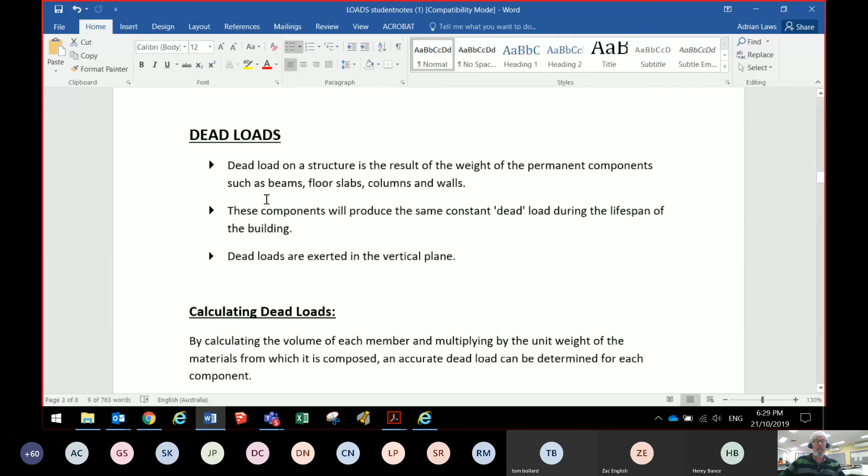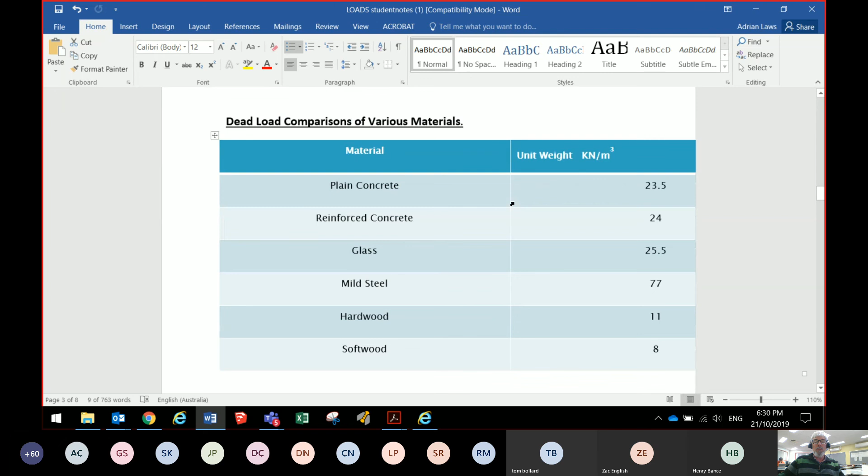Then we've talked a little bit about dead loads, calculating dead loads. It's not that hard to calculate because somebody's already done it for us, and they've given us charts like this, which is taken from, I'm pretty sure, Australian Standard 1170, where it looks at all the different materials. Most of the standards have tables like this where it looks at the materials and gives us the kilonewtons per metre cubed or metre squared or whatever the most appropriate measurement is.

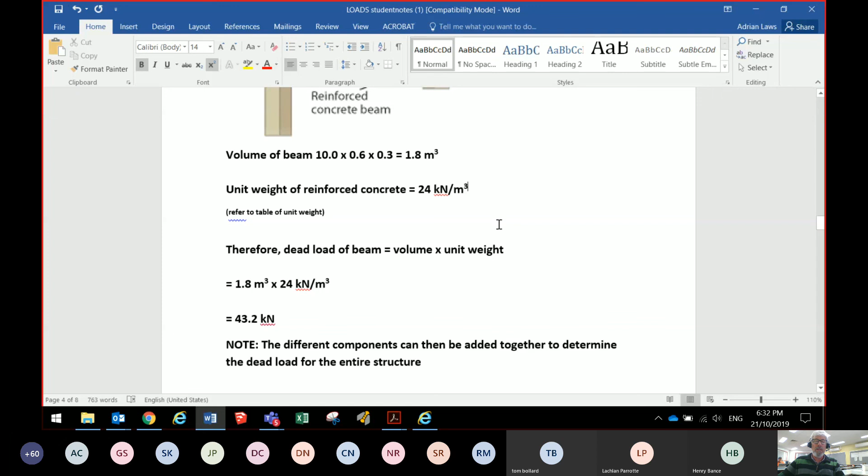If you come up with an answer like 0.8436 or something, and let's say it came up to 0.7, it's better for us to bump everything up to the next nearest amount without going ridiculous, because you'll lose all your jobs. You'll have it so over designed, that's probably the complaint of carpenters, isn't it, that everything gets over designed. So we just bump it up a little bit, and the engineer will allow some safety factors at the end of it all.

Live loads, similarly to dead loads, there's also tables. I'm not sure how they worked all that out, but I guess they set people up like Mythbusters and said, right, we've got 4 or 5 people who can fit in this room, probably less than one person per square metre, and we can probably fit a table and chair.

So you should take this into account if you get a job that says you're going to have a grand piano and some other big heavy object like a spa in the corner. If you're building a floor, 1.5 might not be quite enough for a massive grand piano and a spa and all those sorts of things. You could exceed that, and you might have to take that into account. That's why that information needs to be there for the engineer to make an informed decision. There's another example of calculating the loads, much the same as what we just did.

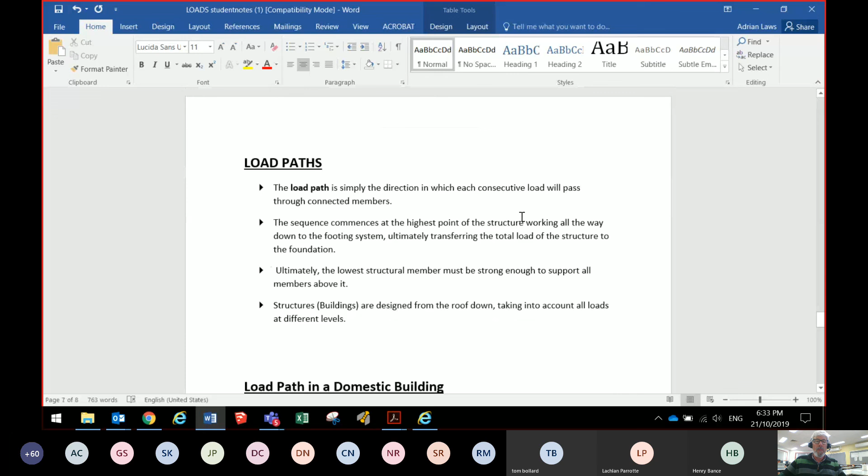And then we look at load paths, and that's pretty straightforward because we went through that activity with you as well. So I'm just going to shut that down. You can find that there, and that's a good example of how you can do the activities you're going to do in a second.

So pretty much I've gone through all the learning stuff for tonight. But what I want to do is open up the activities for you and just quickly have a look at them, so I'll skim through and show you what you're going to need to do so you can jump ahead with it yourselves. I'll jump back here so I can show you the instructions.

There's a couple of activities. I said you'll probably get 8 or 9 or maybe 10 little green boxes tonight. So this first one here, let's pump that over to there and make sure you read the instructions. In this case, it's just complete the quiz, asking you 6 simple questions. Select the most appropriate structural components. If you start off with 1 here, you're basically going to be looking at some of those examples. Drag the term into its position.

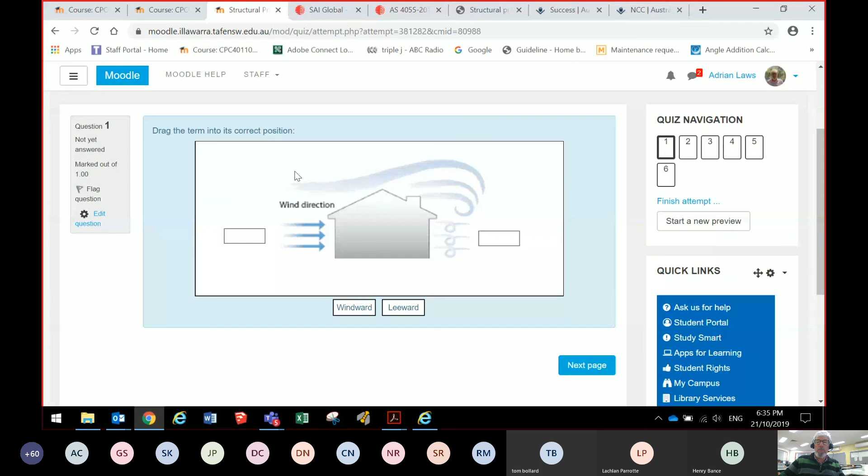That's pretty straightforward. You may need to choose a definition for a particular loading, some of those sorts of things. You might need to answer what's the most common unit of measure. That would be a real good place to go back and make sure you've got that Word document there so you can answer those ones.

I haven't opened this quiz yet. I won't open any of them yet because as soon as I open them, bang, your concentration's gone. I just want you to listen to me for a couple more seconds, and then I'll probably answer a lot of the questions you're going to have in a second when you come to these quizzes.

This particular one says complete the quiz again, and I've already been looking at this, so I'll just continue to the next preview. This one's got 1 answer, and in this particular case, match the correct terms to the definitions.

There's the link that you want, which you can right click and open in a new tab. It's going to take you to this toolbox, and you should be able to gather the information from there. Actually, I'm going to upgrade that link so it takes you straight to the site, which gives you your ductility and things like that.

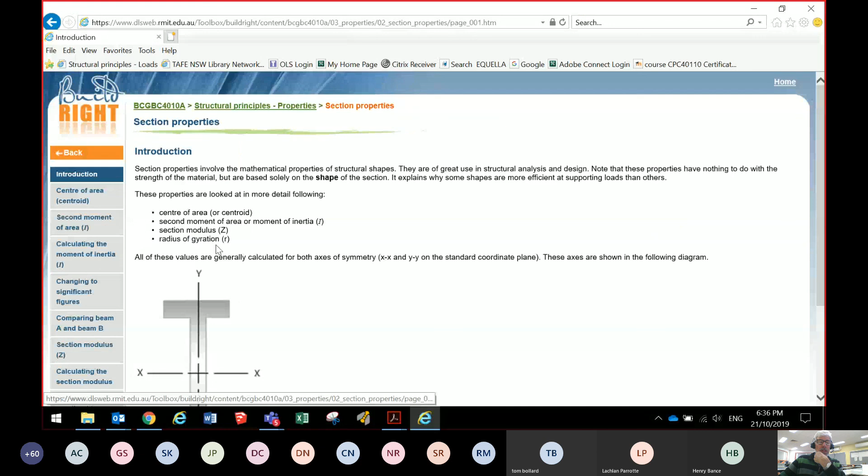That's the actual one we want right there. I think there was one, I'll check that in a second and upgrade it. So that link's probably going to make it hard for you to find that quiz, so I'll jump back and fix that for you in a second. Just be aware of that.

Oh, there's six here. And then this next activity, you'll see down here what you need to do is download this worksheet. That'll be available for you in a second, you'll see what that looks like. When you download that worksheet, you're going to go through and do similar to what we had with that other activity where you had to calculate the live loads for dance floor, dead loads.

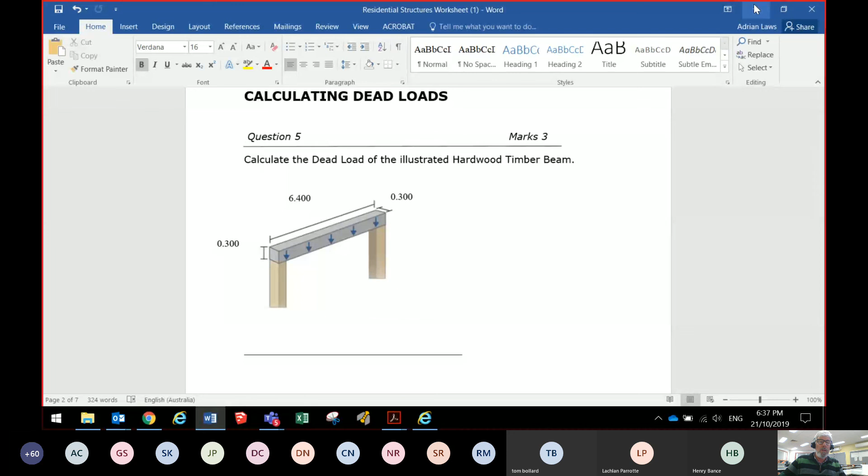You're going to get all that information for those activities on this Word document, but the figures will be different, the numbers and things will be different, so you're going to quickly complete that yourself. That's quite a good activity that's going to basically take you through it. If you've got this one downloaded, you'll be able to follow through and figure that one out. Then you can submit that once you've done it, up here into this worksheet. And then that's pretty much it for you.

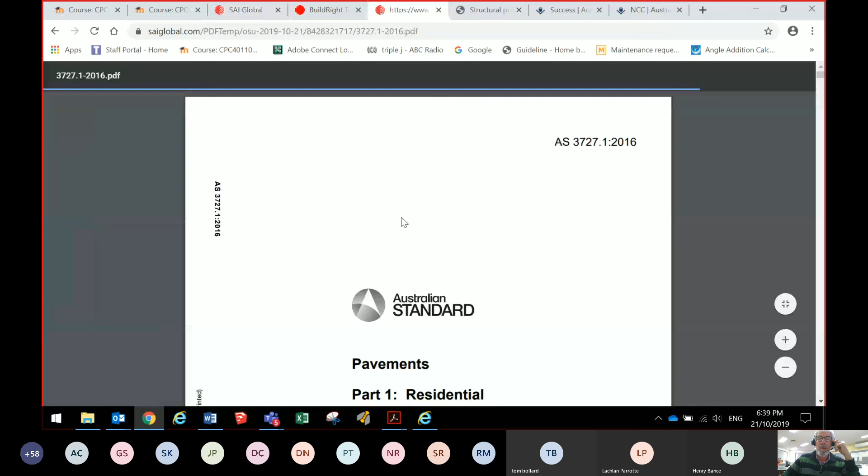But if you look at this one, I'm just going to download that so we can view it a little bit better and get all our bookmarks and things. If you have a look at this one here, we've got things like I said, it's always the same: contents, scope and general, design, materials, general, construction of concrete pavements, construction of segmental and flags, asphalt pavements, bituminous. So ours would be the concrete pavements one. Let's get that big so we can see.

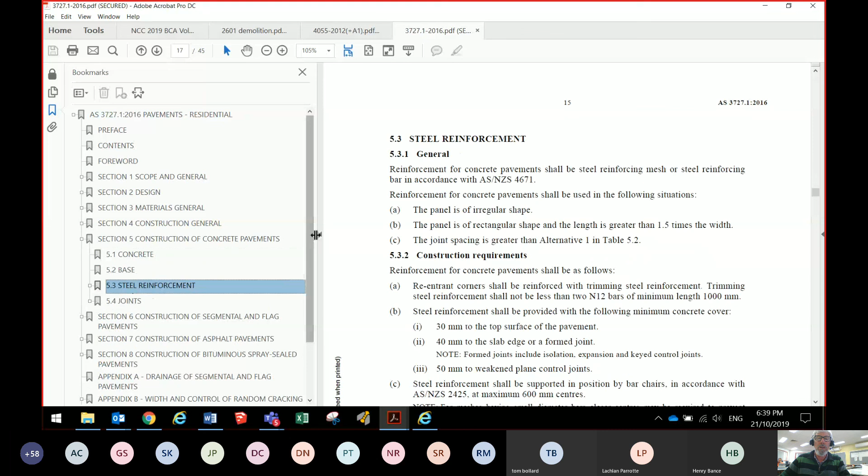Steel reinforcement, you can do a little search through here and have a look. In fact, this is going to say - make that bigger so you can see. Oh, that's too big, that might do. Reinforcement for concrete pavements shall be steel reinforcing mesh. So that's probably not quite what we want, because we want to know, do we have to put steel in it? I'm gathering that's the question being asked there.

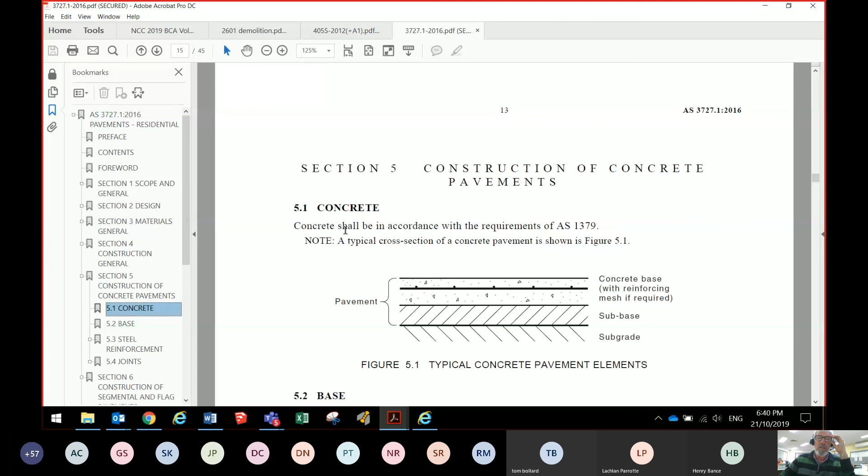The recording can stop if you like, Glenn, I'm just doing a pavements bit, but it's a little bit off the topic. You can leave it going if you like. It says here, concrete shall be in accordance with the requirements Australian standard.